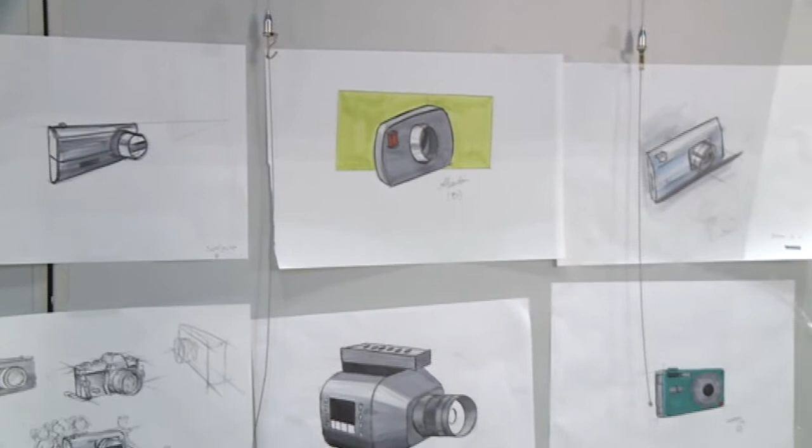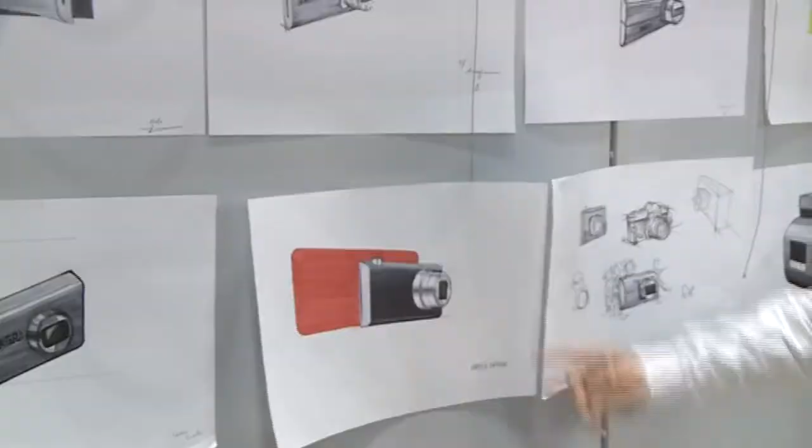To me, this sketch looks good because it's on perspective, right proportions, and also showing a lot of texture. Shiny parts look shiny, matte parts look very textured with a 3D feeling. Looks good, and also the bottom one has a red background. It really stands out because of the red, and this red and the camera black really match together. Also the perspective is kind of correct, looks good.

This sketch also looks good. Perspective is correct, and the body itself is thinner than my sketch, but it looks original. They're showing two different views, really illustrating his own design. So it looks good.

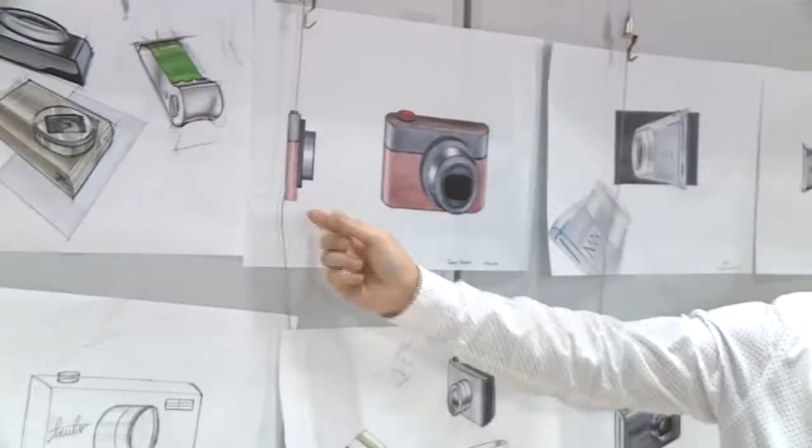And this sketch too - it has a very powerful feeling, really stands out, showing that side view. It's conveying a lot of information. Maybe a little bit too thin compared to this quarter view sketch, but really well done.

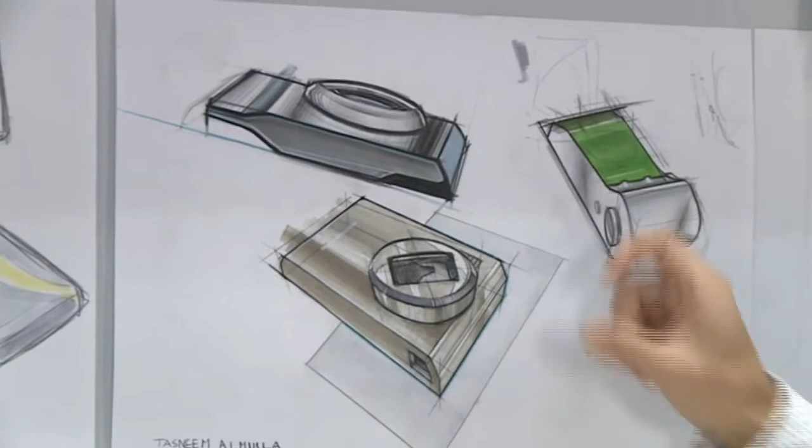And I like this sketch too. Looks really dynamic, and the perspective balance looks good. He slanted this like a black lens - it looks cool to me, design and styling wise. So that's my impression.

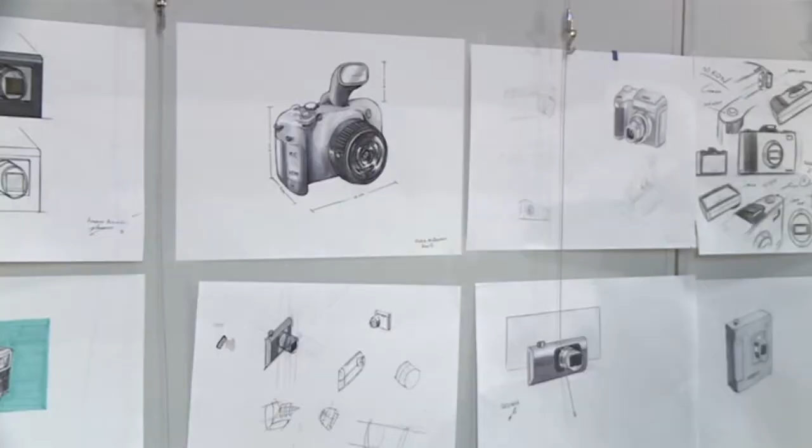On the second wall, Hosono and me were kind of interested in this paper, this sketch, because it's color. The background has got some kind of shape, showing a lot of atmosphere, and so many shots on one paper - reflections too.

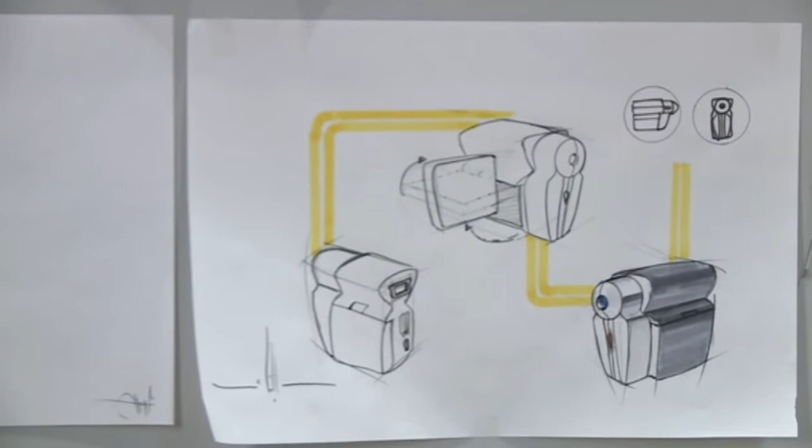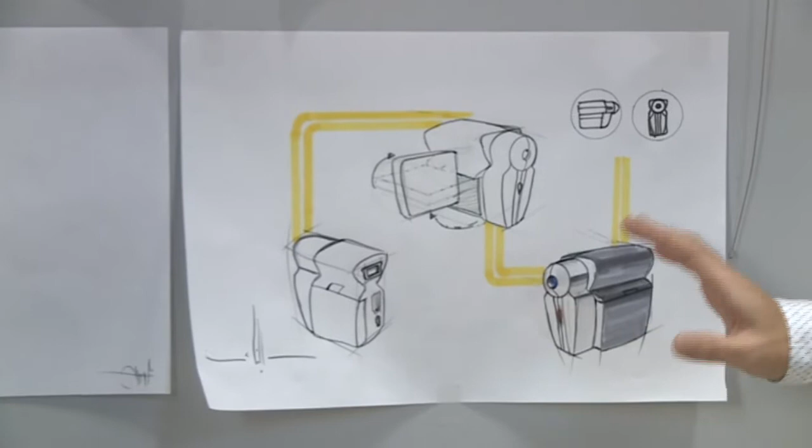Looks different. Everyone tried to get nice perspective, nice rendering, but it's too much influenced by my sketch. But this design is really different and looks original, so that's the reason it catches our eyes.

So we also picked this sketch. It's kind of a unique surface, it's melting down, and the sketch itself has a very powerful feeling. It's really popping out and showing dimension.

And I like this one too. It's kind of accurate drawing, but a little bit too small I think. When you paste your sketches on the wall, that's a kind of weakness - it should stand out more. But the perspective looks nice.

Any others, Hosono-san? Well, I don't have so much.

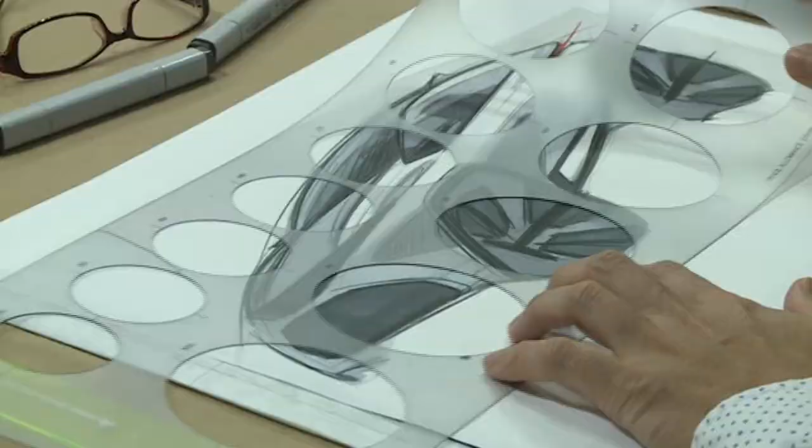I'm looking for the right ellipse guide.